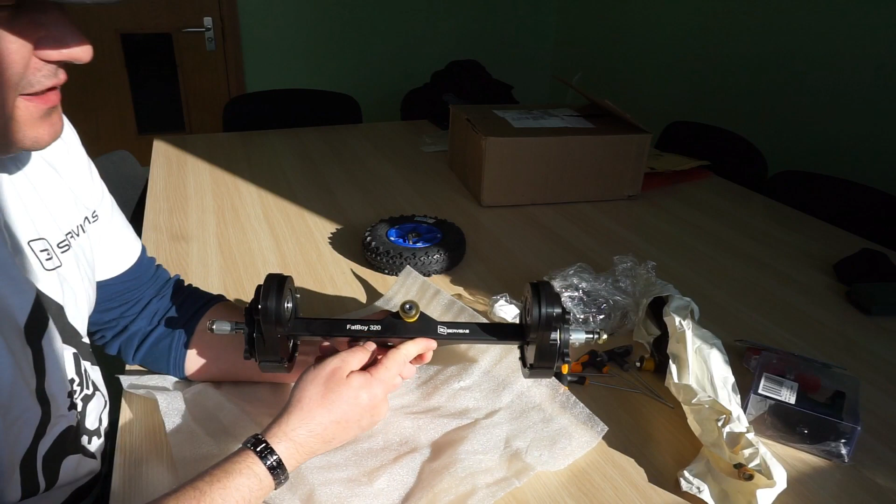Bear in mind that a lot of parts here are not included in certain packages, so I'm going to run by all the pricing a bit later, but let's take a look at the gear drives themselves. This is what I'm going to use on my new DIY build. These are the Echo 320 Fat Boy assembled gear drives by 3DServisas.

This variation here is black anodized, so you get this nice beautiful coverage on it, which is very durable and nice, absolutely lovely.

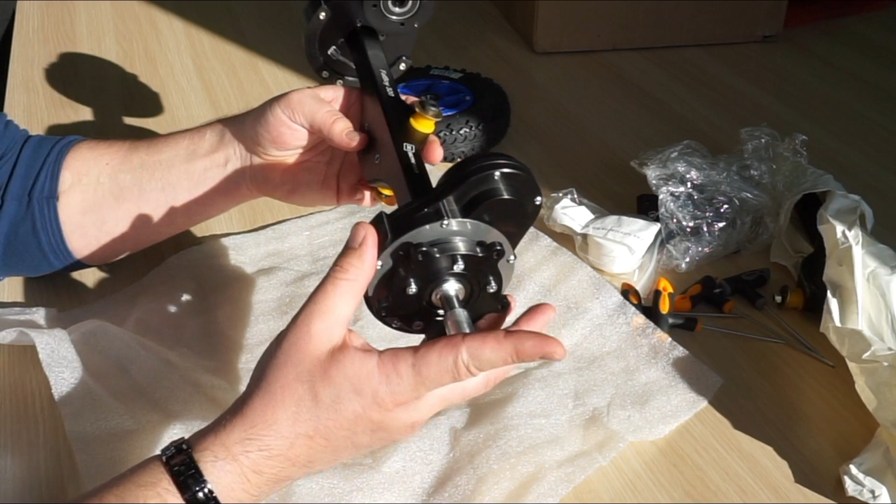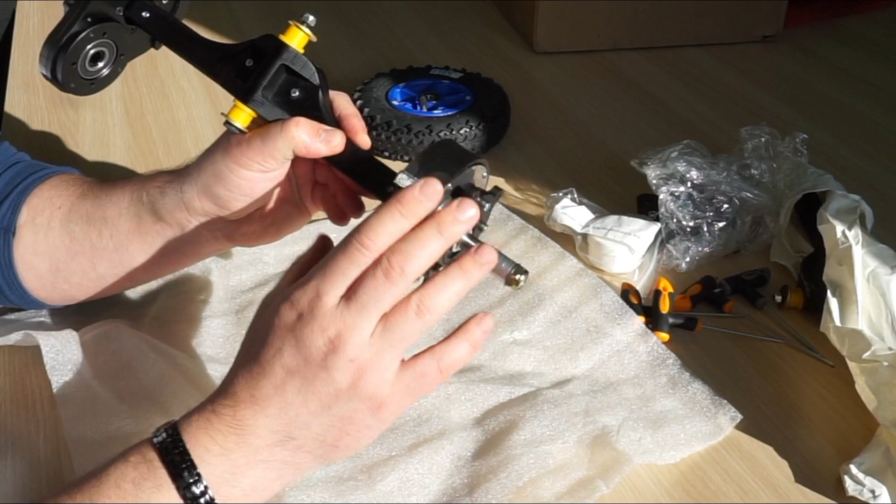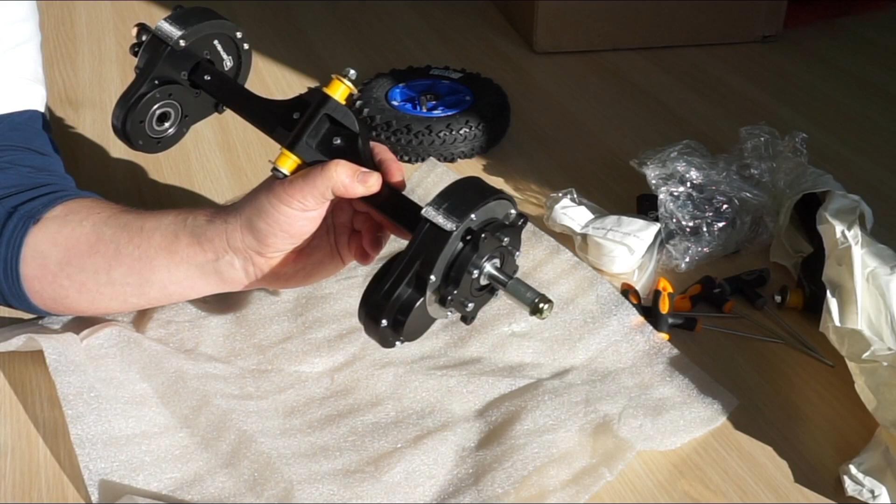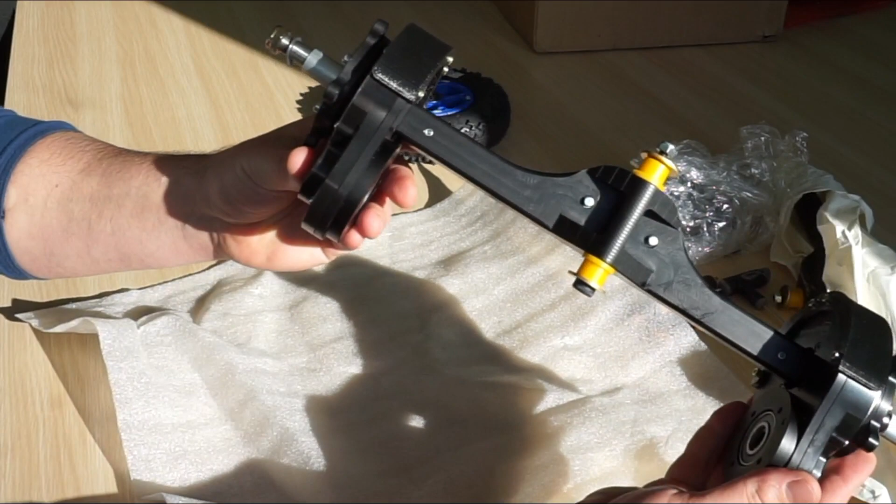So very quickly about this whole setup. The gear drives are sold separately, this is the gear drive itself right here. Two of these gear drives will set you back 240 euros, that's without the hanger. You can also get the hangers if you want, and they are 95 euros in black and 90 euros in raw aluminium look. At this particular moment what you're looking at is a complete setup with all the spacers.

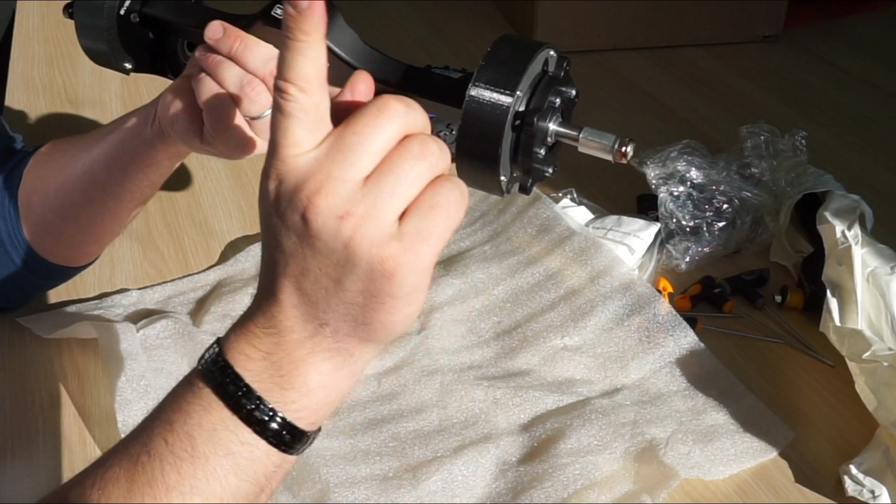Washers, nuts, everything you require, even 3D printed bumpers that protect your gear drives from damage of the rocks. By the way, it's nice that 3DServisas actually has the STL file for printing this out on their website, so you can print them yourselves if you guys want.

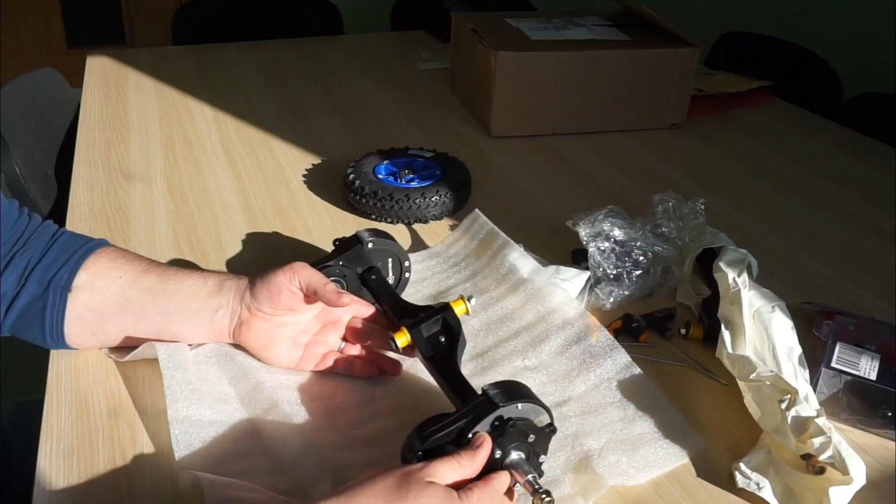So back to gear drives. These gear drives here are available in two different variations, meaning the gear ratios, so you can get them in 1 to 3.5 or 1 to 4.2. The recommended wheel size for this gear drive, because it's quite small, is 8-inch wheels.

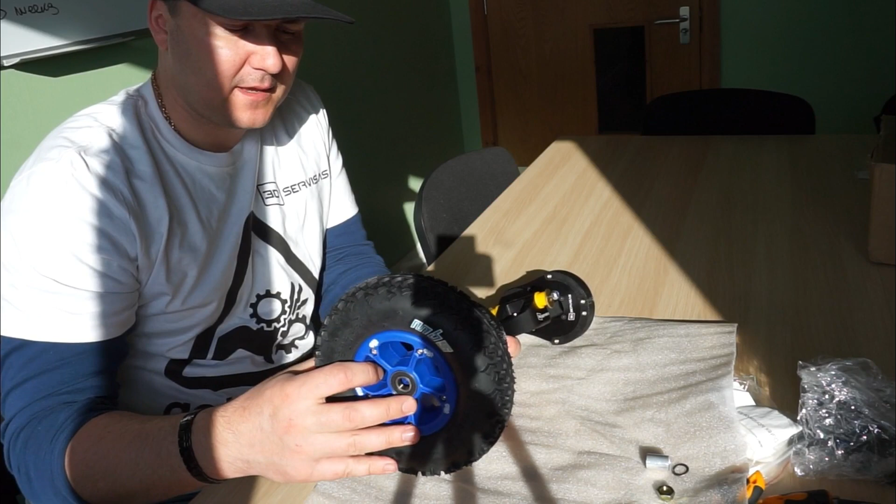So I'm going to be using the MBS wheels. That's big enough for me, very nice. If you go for a bigger wheel, you will probably put just a bit too much stress onto the gear drives themselves, so it's not recommended.

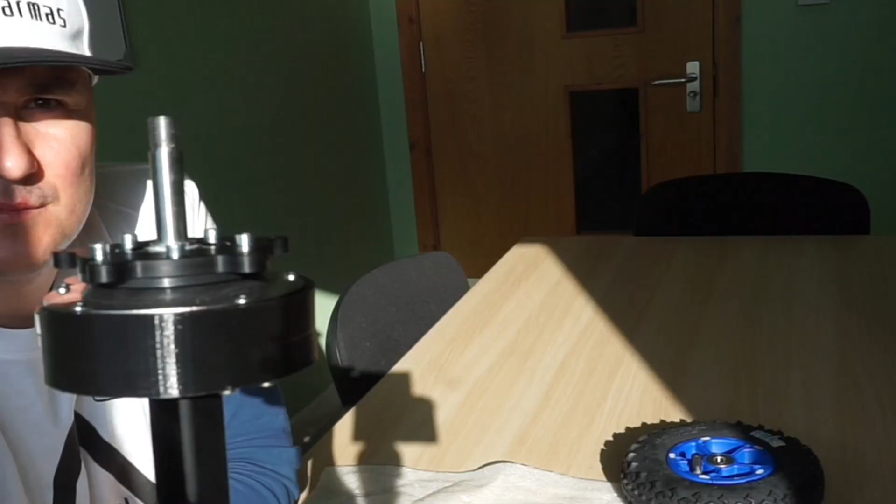Axles - these axles are high carbon steel and they are 12 millimeters. They are provided, if you buy them, with the screws for the actual motor assembly, and with the nuts that are holding down the wheel, which is quite nice.

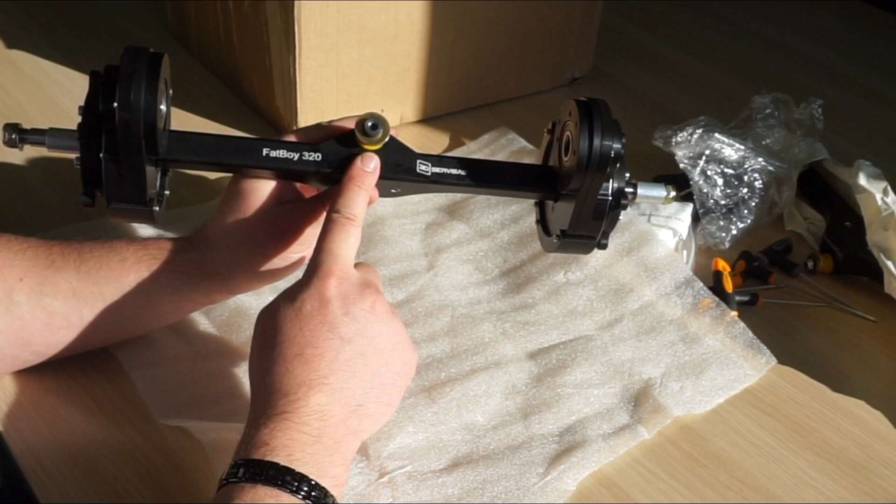So just a little bit up close, guys, let's take a look. So this is the hanger. You don't have to buy this particular hanger because this here is actually designed by 3D Servisas. This is the Fatboy 320.

Really nice and solid. Let me show you the hanger on its own. Really nice and solid unit. Very, very nice. The axles, I would like to mention, actually protrude all the way through.

They are screwed in on a thread and also fixed down by an Allen key that stops them from coming out. They are also glued in, so there's no chance they're ever going to come out. Very nice. You've got your adjustable screws here, this is to tension.

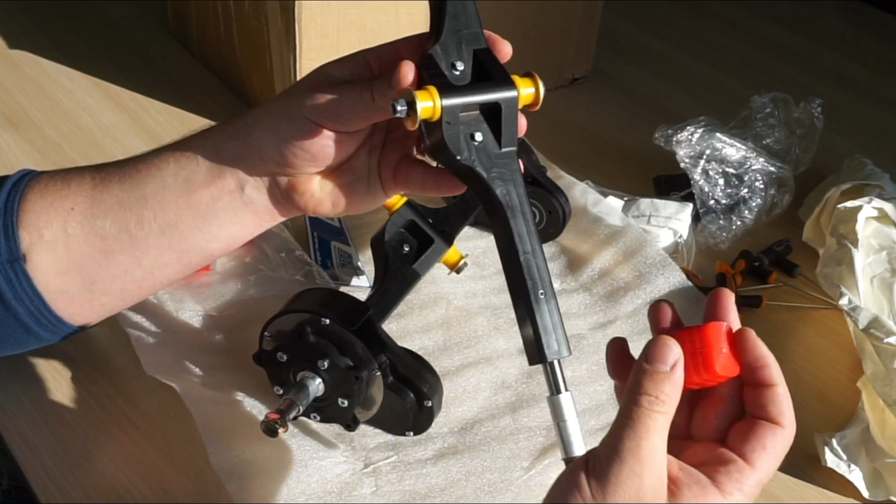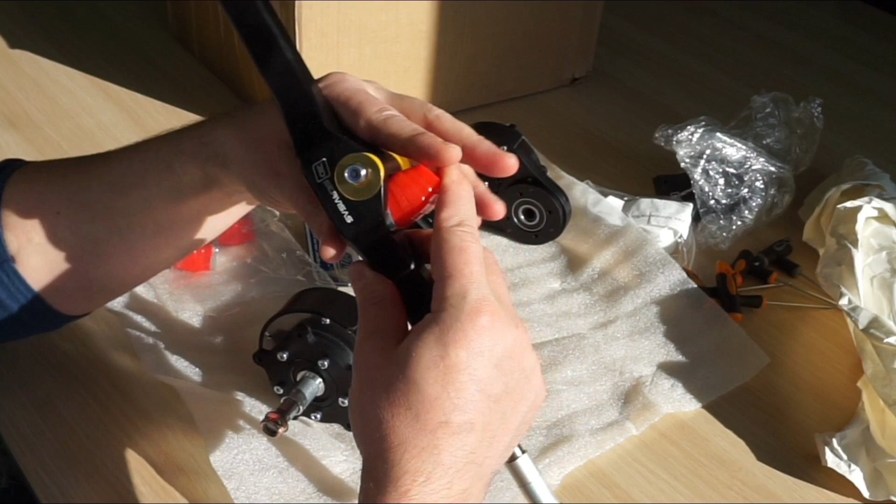This is to tension the shock blocks. By winding that in, you put more stress or compress the block, which gives you a bit stiffer suspension, which is quite nice.

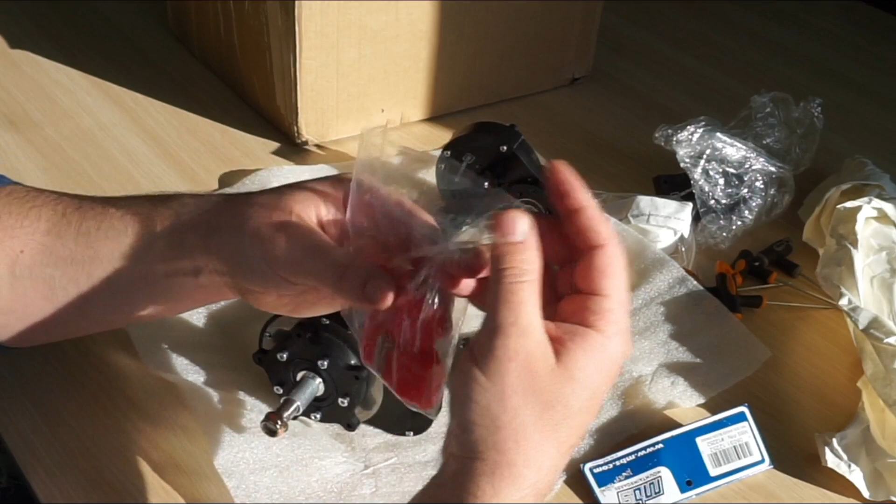These parts here, I'm going to be using the MBS blocks. They come in 3 different colors depending on the stiffness, but I'll cover this in a future video.

I've ordered myself the full set, the front hanger and the rear hanger. I've already assembled the gear drives on them, and I've got pretty much everything available on the 3D Servisas website, parts wise, including the protectors, which are 3D printed.

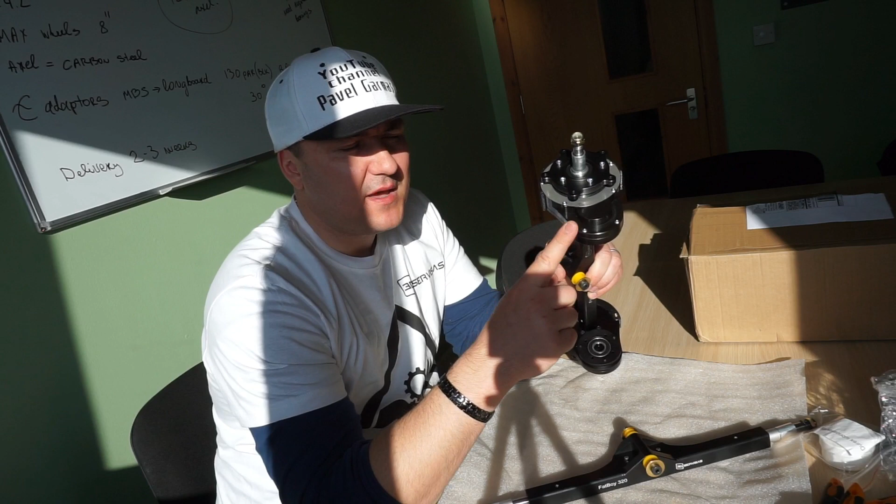What I'd like to mention is it's possible to buy these gear drives without the actual cover, if you wish to 3D print them yourself. I'd recommend it, and I'm sure some people will try, but I went for the original covers made by 3D Servisas because these are CNC'd out of hard plastic, so this should not break on me at all.

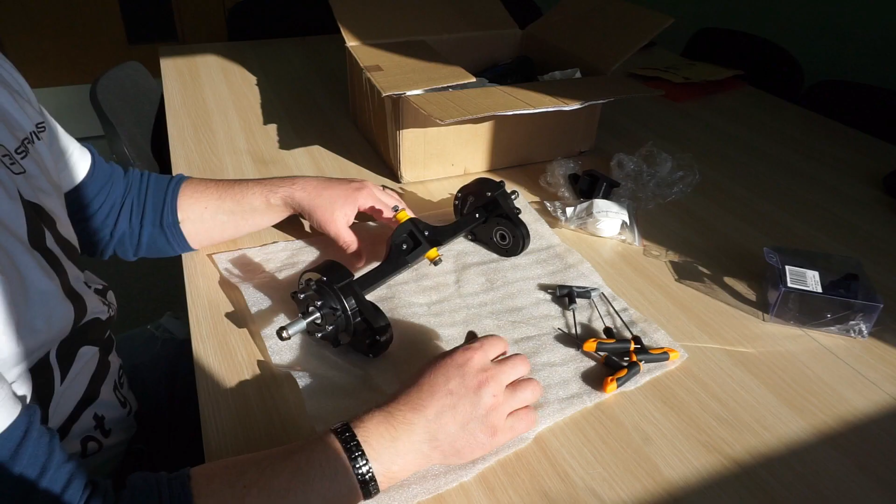So just to make it a little more interesting for you guys, we're going to take one of these apart and I'll show you what's inside.

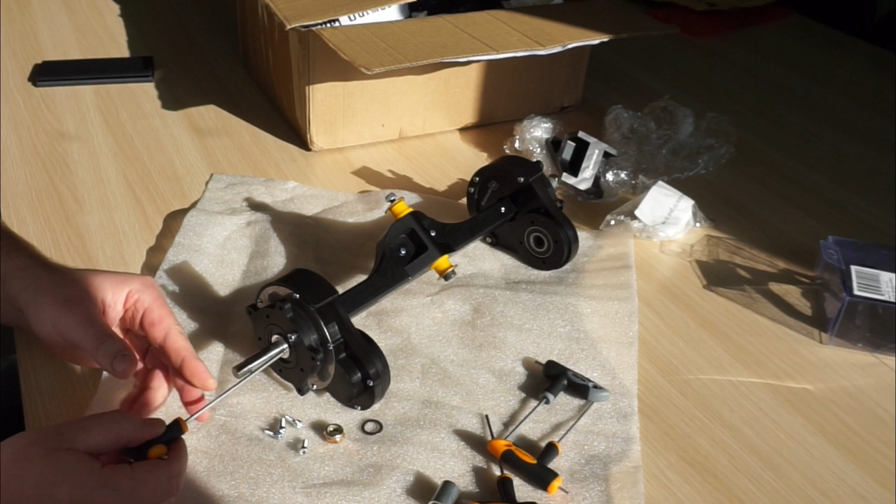So we are removing the bolts that are holding the wheel adapter. Advice was not to actually use Loctite on these bolts because it's going to be very hard to take them off.

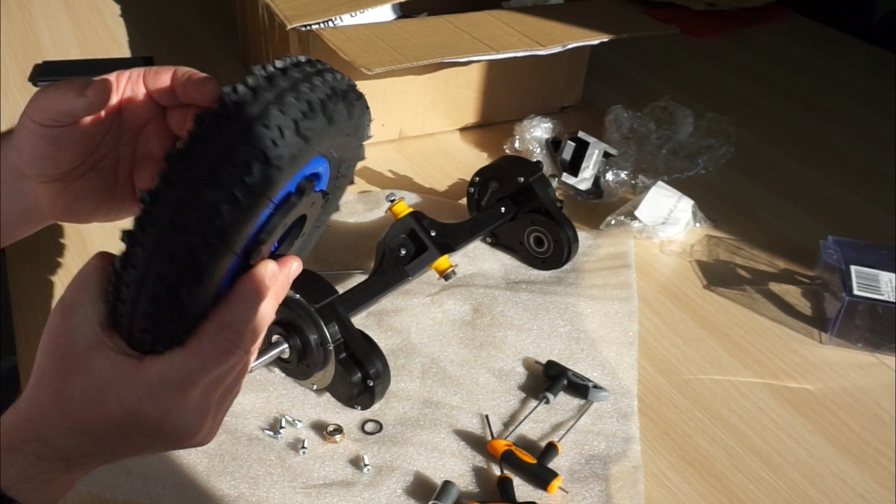So this is what's going to be fixed to your wheel, and then you fix that onto the gear drive and you're done. This is now going to be spinning.

Next up, what we've got here is a rubber seal. It's very important to put some oil on this metal plate. You see this metal plate here? This is purposely designed so that the rubber seal can slide on it, so a bit of oil should be put on it before you start using your gear drive.

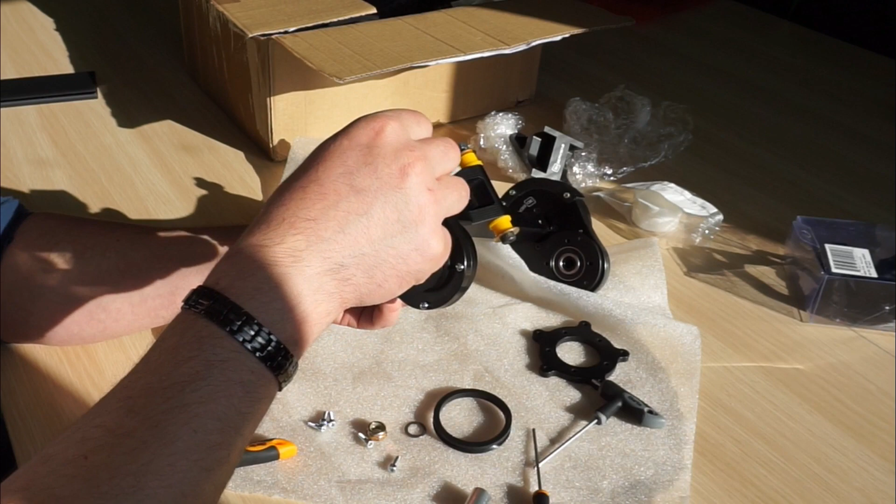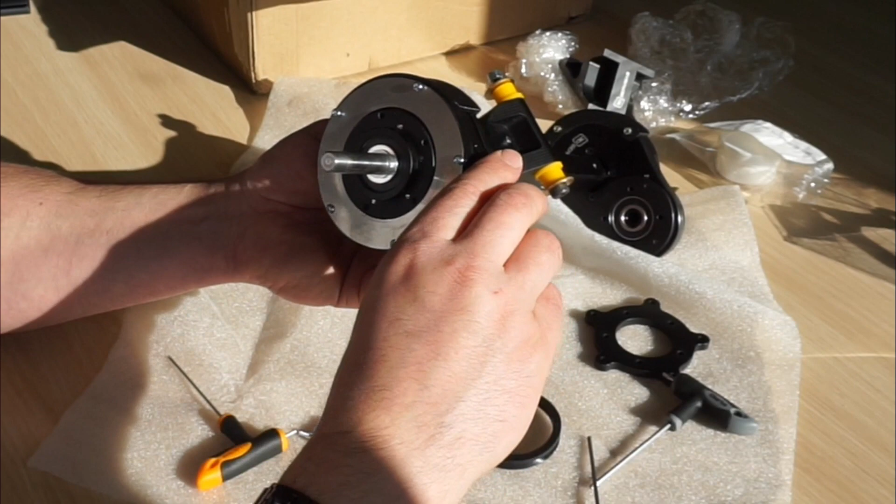Let's go further, let's take this cover off to see what's inside. I've removed all the screws that hold the cover down. Now we will gently remove the cover. And this is what you see inside.

The large yellow gear, this is the one connected to the wheel. And then you've got the aluminium gear right here that's going to be connected to your motor.

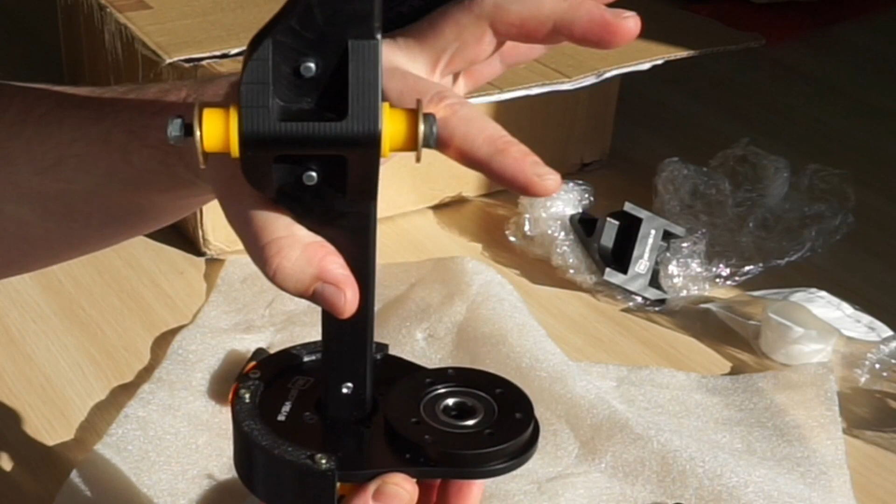So installation of the motor is very simple. You take the cover off, then screw down the motor, so the motor goes right here. From inside you put the screws through to hold the motor down. You've got the keyway in this gear and also the keyway on the motor shaft. You put some Loctite on it to keep it all in place and you're pretty much done.

It's quite simple really, guys, and it's lovely as well. That moves really nice. Sorry guys, I'm opening this up together with you for the first time, so I've never opened this before.

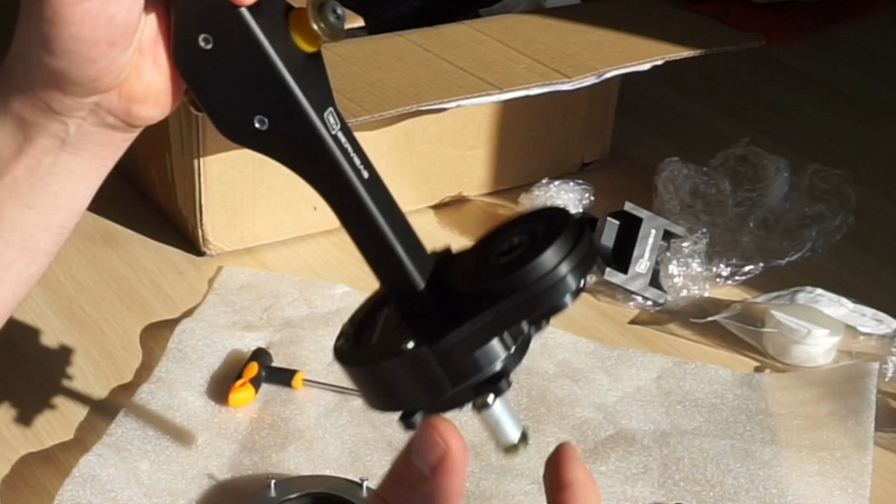That is absolutely lovely, and the motor gear is spinning on its own bearing, this bearing right here. It's very nice, very smooth, very precise.

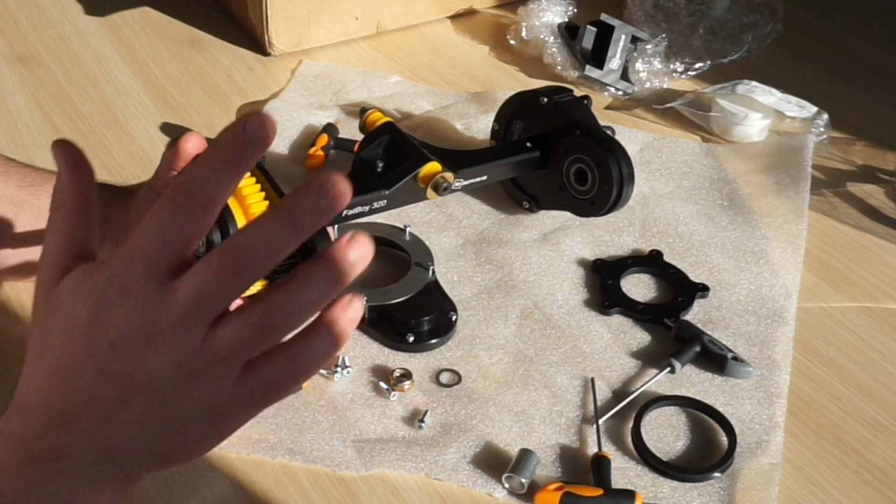These here are the straight gears, by the way, guys. This is the Eco, and Eco uses the straight gears. I'll explain a bit more about the difference in gearing in a couple of seconds, so bear with me. That's pretty much how it looks inside.

Not much more to say. One important thing, guys, a very important part: when you're ready to close the cover back up, your motor is now installed, everything is secure, you have to remember to put grease on the gears.

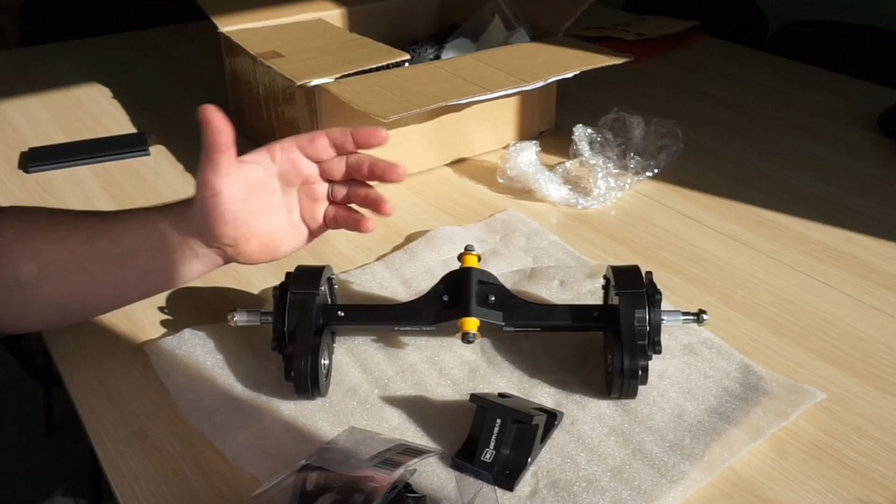Before I do a quick summary of pricing and other information, let me show you what else I purchased from 3DServisas. I'll use this gear drive and hangers on my board with the longboard deck, not the Trampa style deck with tilted up ends, at least for now. I'm still going to be using the MBS base plate, which would go just like that.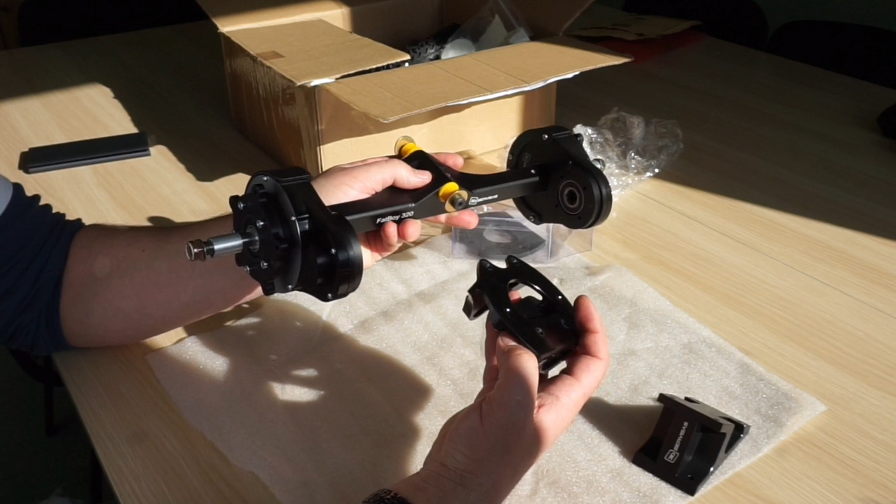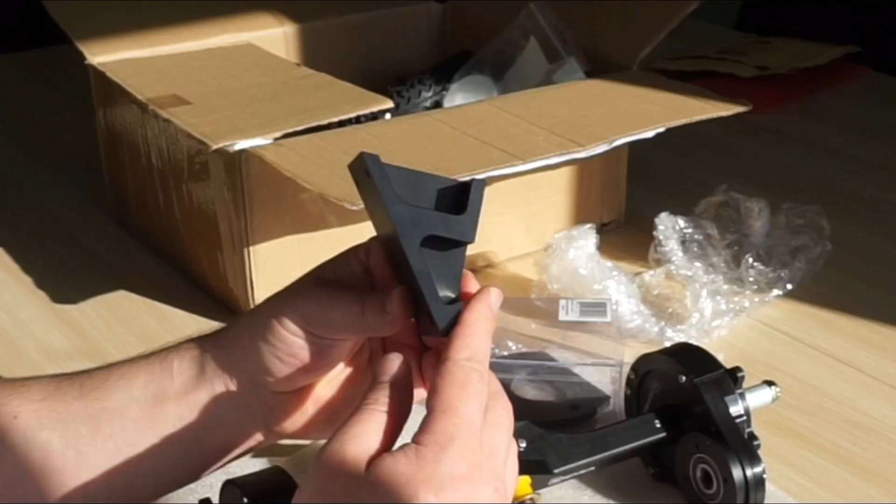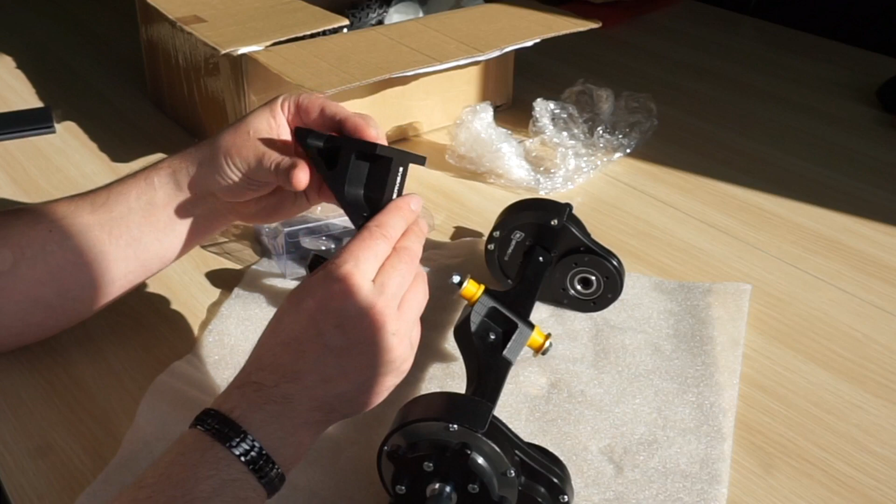But because this system is designed to be on an angled board, I've got adapters. 3D Servisas makes a really high quality wedge adapter, solid aluminium, which gives you the angle you're missing on a straight board. These wedges come in two angles, 30 and 35 degrees. I bought both, two 30s and two 35s, so I can play around with angles. At the back I'm going to wedge it a bit more than at the front, which should give me stability.

I know there are adjustable base plates as well, but I don't want to use them. It's another moving part, another thing people will fiddle with, angles and all. I think two choices is good enough for me, but that's just my personal opinion. And it looks really nice, this does. Really nice, the quality is absolutely superb.

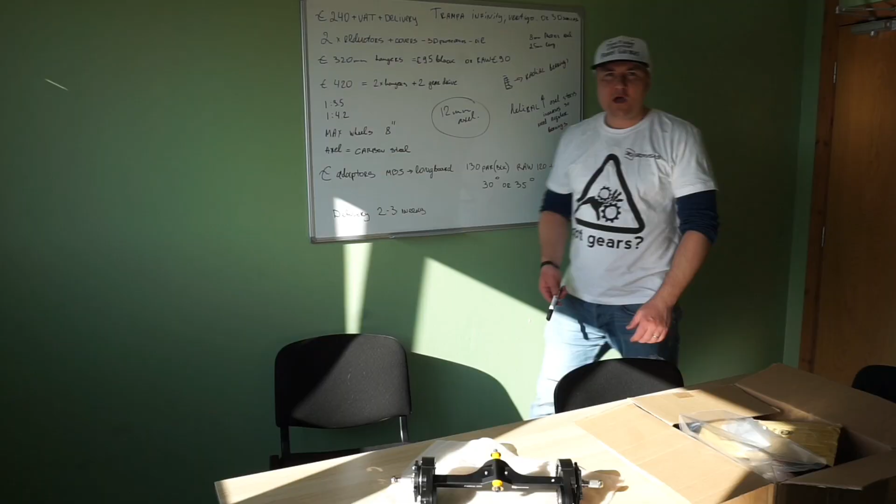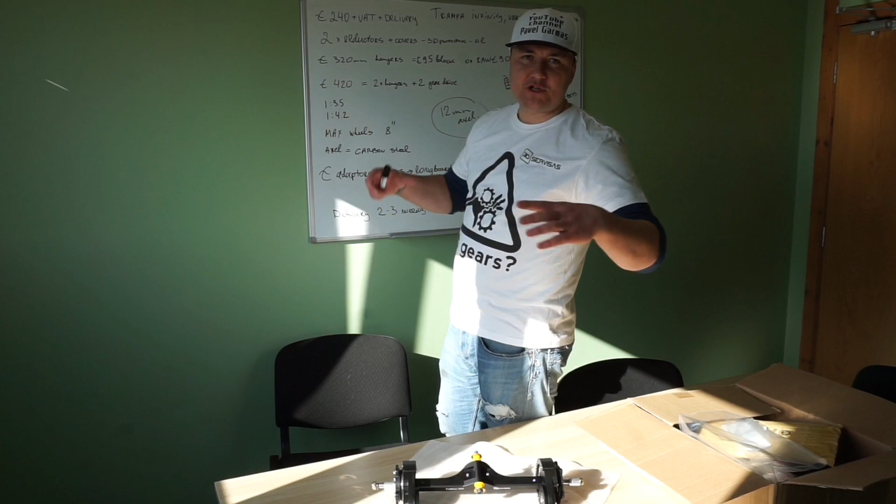So guys, let's go over a couple of bits. It was a lot of information, but I'll go through certain things I want to mention. You can get two of these gear drives, fully assembled, but without the hanger. It will come with all the necessary bolts to fix the gear drives onto Trampa hangers. So Trampa, Infinity, Vertigo, those kinds of hangers are good - you can put the gear drives on them. Or you can get the 320 Fat Boy, which is designed and made by 3D Servisas. It's up to you. So 2 of the gear drives without the hangers will cost you 240 euros plus VAT.

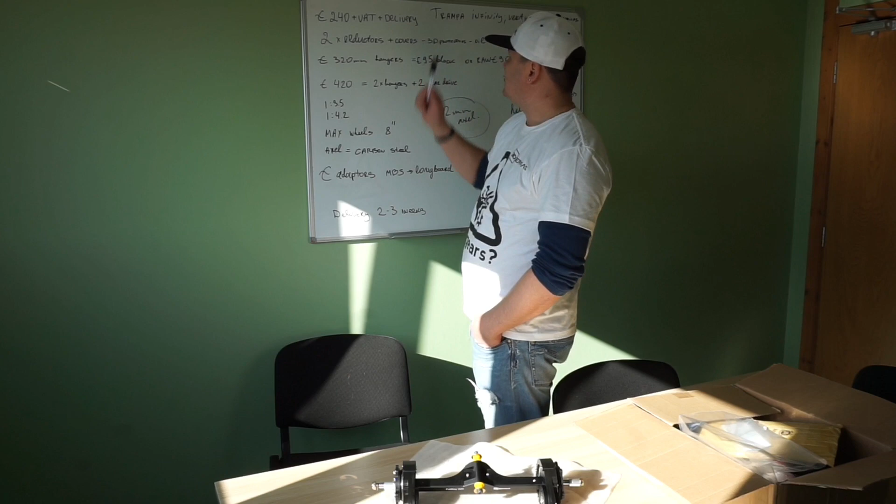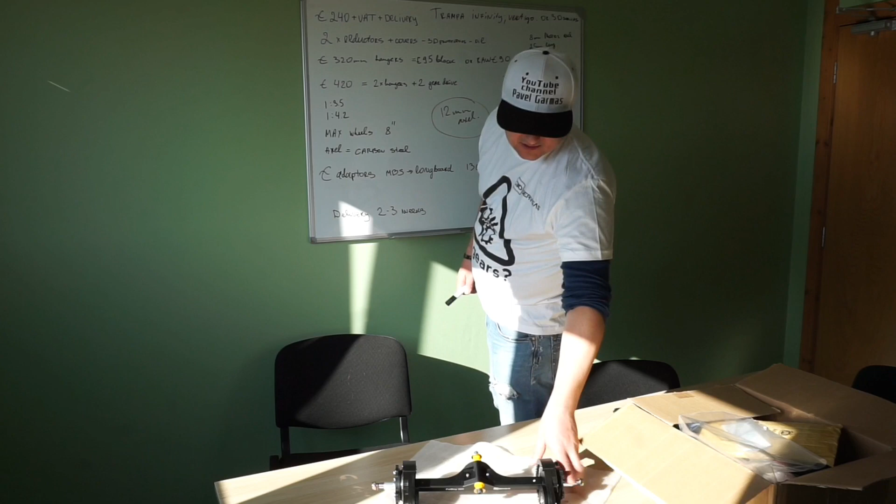That's 21% VAT in Lithuania, plus delivery. You can also get a larger kit which will contain the hangers, same as you saw in my video, minus a couple of little bits like the 3D printed covers and spacers, and that's going to cost you 420 euros plus VAT plus delivery. But that means you have the whole lot, and you can ask Arunas to actually assemble it for you, which is quite nice as well.

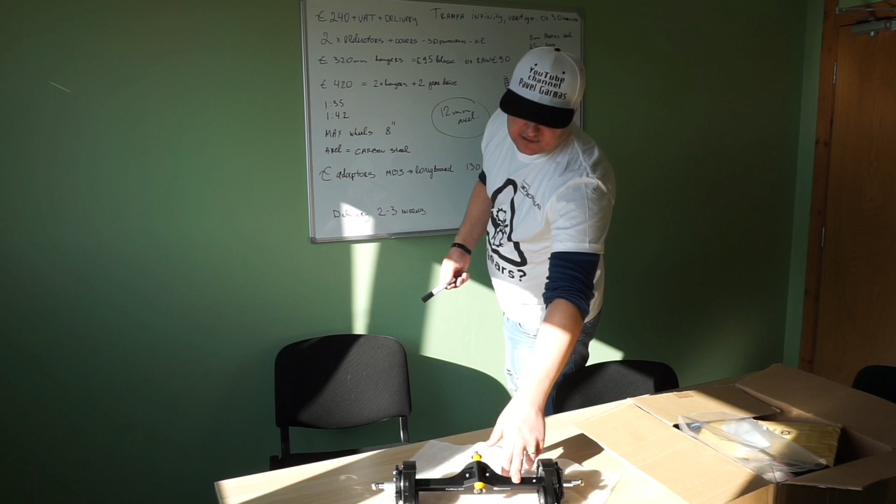You also have a choice between anodized or raw. It's a very small difference, like about 5 euros, so I always go for anodized - I think it looks much nicer. But if you want it looking shiny like raw aluminium, why not go for that?

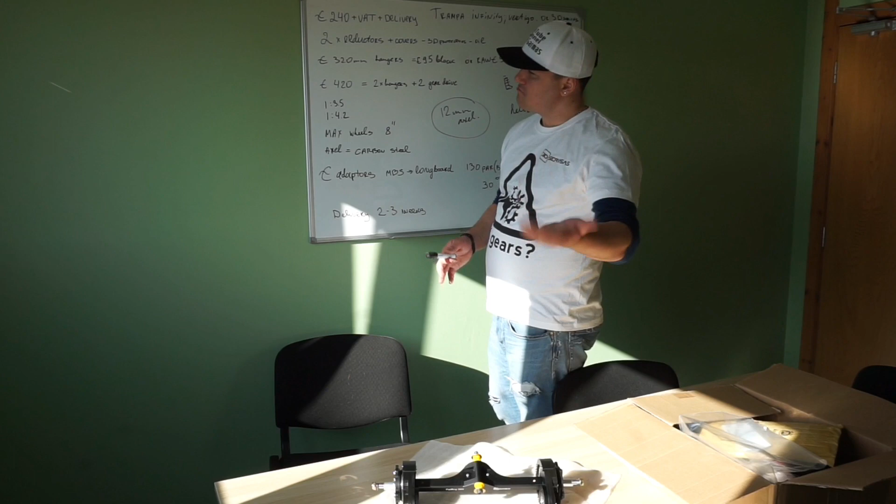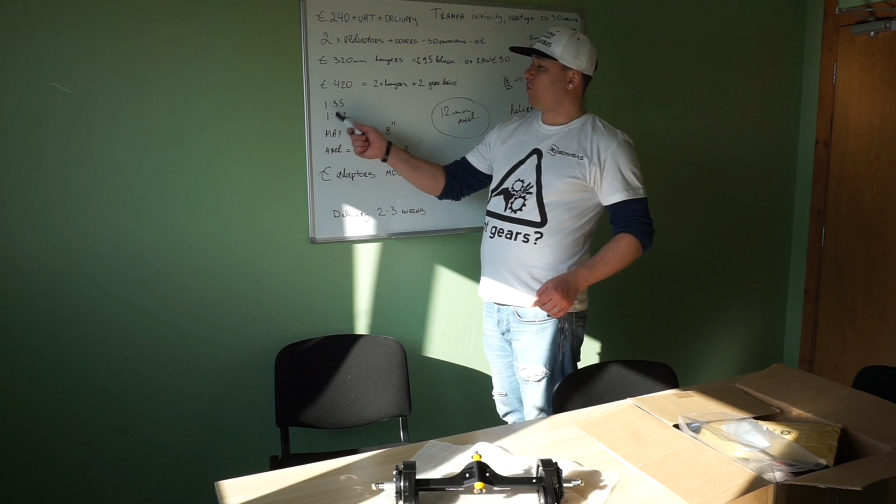There are 2 types of gear ratio you can order: 1 to 3.5 or 1 to 4.2. It depends on your setup, your motors, your wheels, and what you actually want from your board - you can decide. Maximum wheel size recommended for these gear drives is 8 inches.

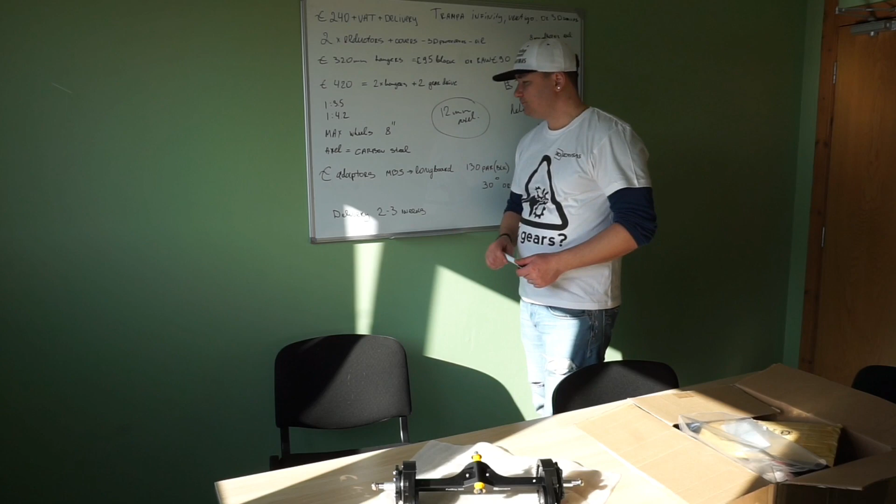As I mentioned, these axles right here are carbon steel. They will rust, so it's always recommended to put a bit of oil film on them. You can go to an even more expensive gear drive by 3DServisas with titanium axles, but I don't need that on my board - I'm happy with what I've got. These gear drives are eco, so he's trying to reduce the cost so people can get it. To be fair, for 240 for 2 gear drives, I don't know if that's bad or not, but to me it doesn't sound too bad.

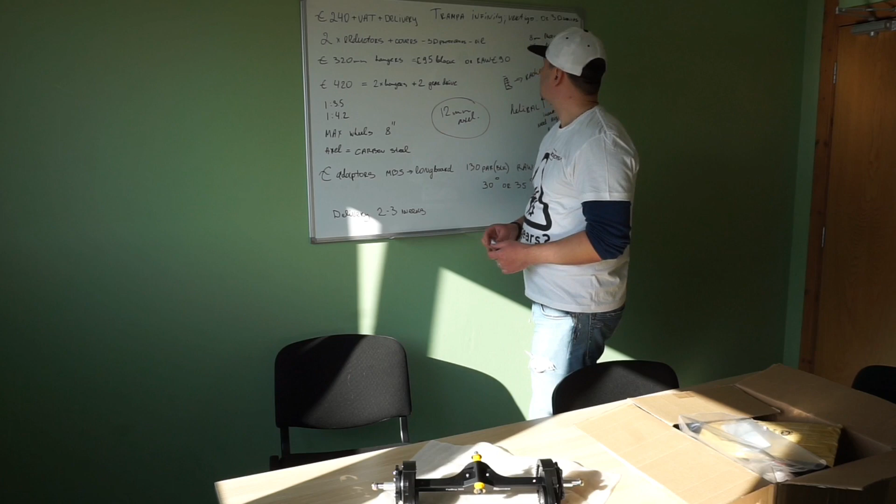Now, for the adapters guys, with all these wedge adapters, you can use this set and these hangers on a normal longboard deck.

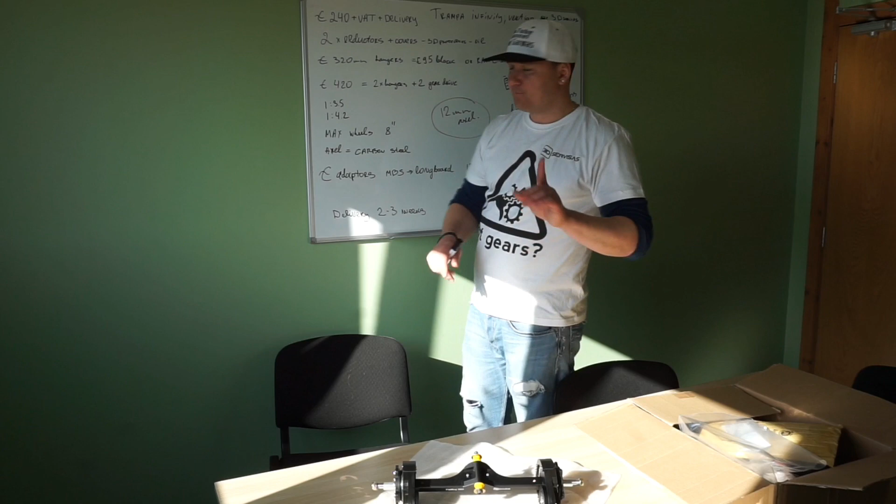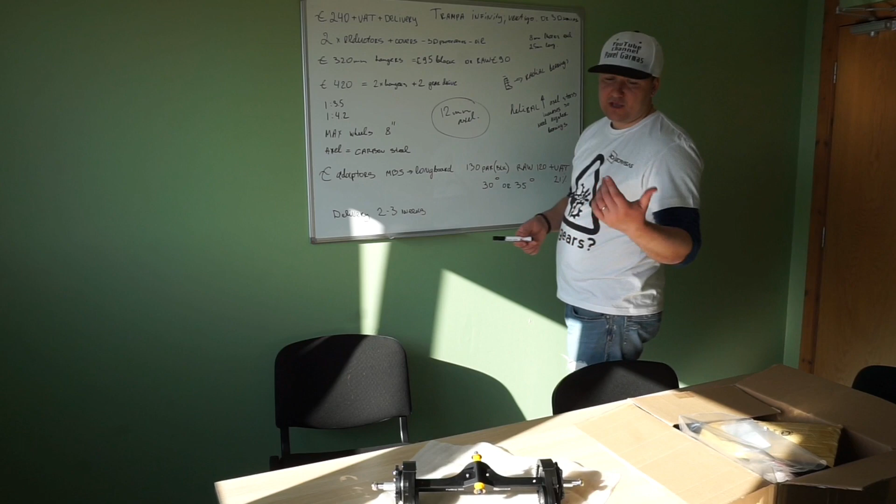For 2, you're looking at 130 euros in black or 120 euros in raw aluminium, plus delivery. You can get them in 30 degree or 35 degree, depending on what you're trying to achieve.

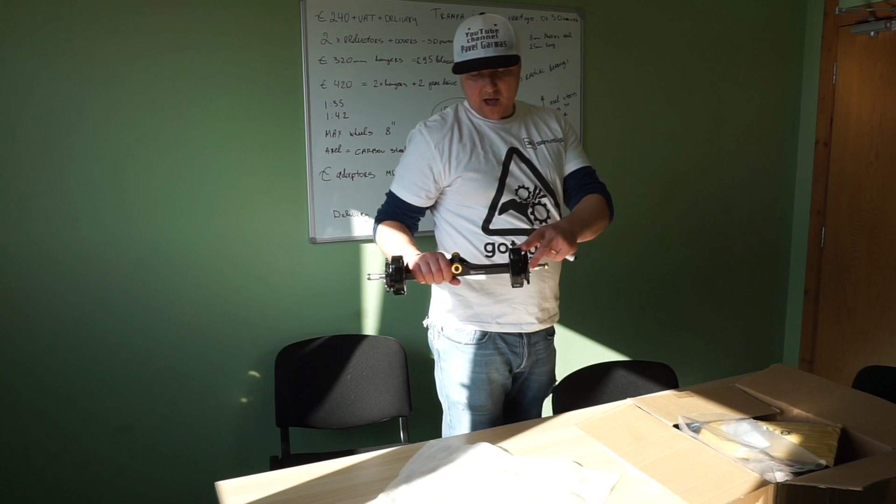The motors that will work with these gear drives, pretty much, they're massive. You can use really big motors, but one thing to remember, the motor shaft needs to be 8 millimeters, and it should be 25 millimeters long, which is normally a standard size. These are the newest generation of gear drives, so you don't have to cut the motor shaft to fit them in. It goes straight in, done.

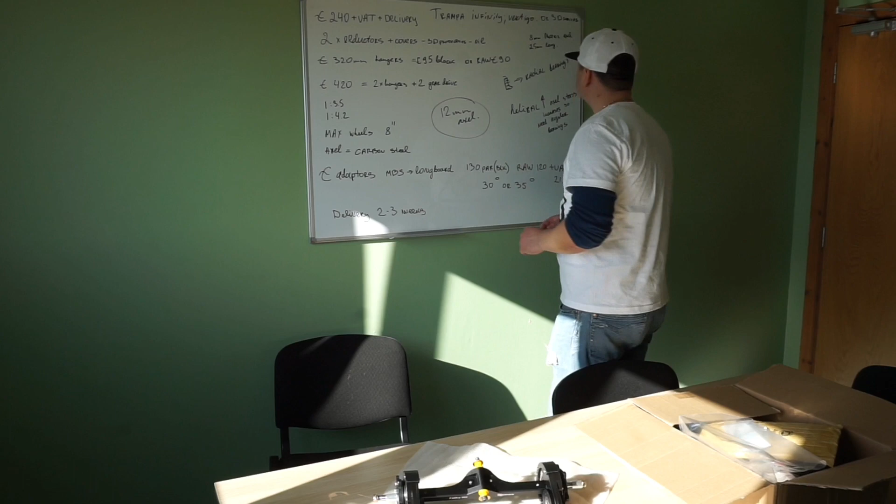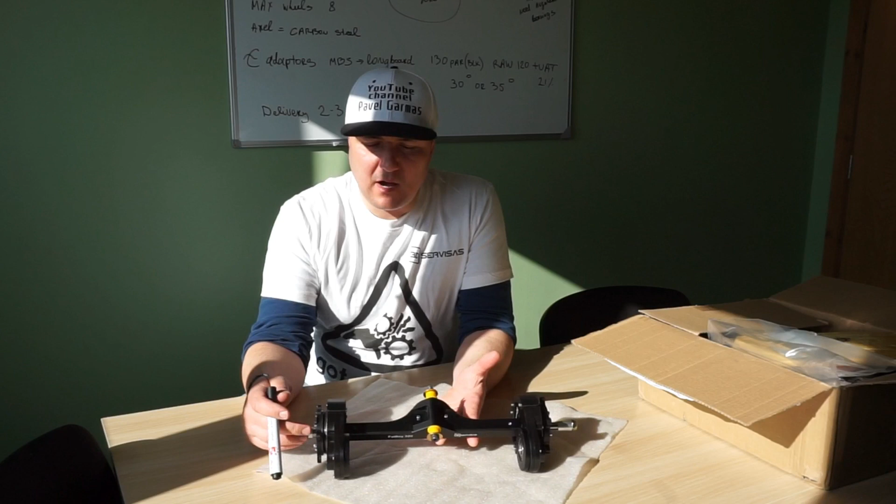So that's that, and I think I've covered everything I had in mind for this video. Delivery is 2 to 3 weeks, sometimes much faster than that. I'm not sure about time right now with all the coronavirus, but he was confident that he can still get parts over to you.

As I've already mentioned, these gears here are straight gears, not helical. Just for people who don't know, there are 2 different common types of gear drives, helical or straight. There's a lot of debate about which one is better, which one is quieter, which one is stronger. I'm not going to get into that. I'm just going to say these are straight.

These were proven to be strong, tested by 3D Servisas. I'm going to test them soon myself, so should be quite fine. The only thing I'd like to mention is that the biggest difference between helical and straight gear drives is the way manufacturers try to deal with stress on each individual tooth of the gears.

Think about it, at one certain point, one tooth takes the most stress of the spinning parts. So by using helical gears, when they're twisting, you're actually increasing the surface of the tooth, making it stronger. But in real life, it's only by 2 or 3 millimeters.

So it's a big debate out there which one is better or stronger, but again, as I said, I'm not going to get into this. These here are the straight gears. Are they louder than helical, or is helical louder? I don't know. There's a lot of videos on YouTube about it and people have different opinions. I don't have my opinion as yet.

This is my first gear drive that I'm going to use on my board. Very excited, it's beautiful quality, I'm happy with it so far. I haven't run them yet, so I don't know, but I already have a good feeling about it.